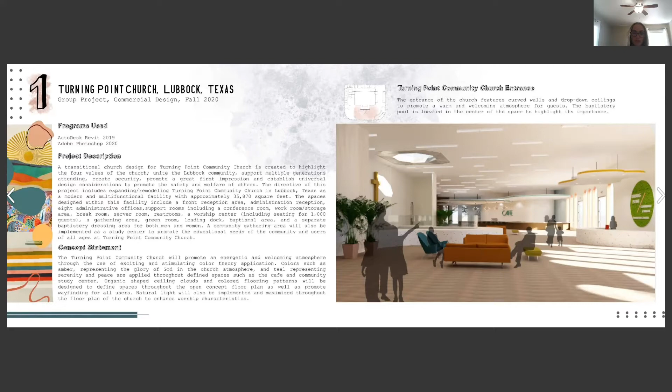Next, we have the Turning Point rendered floor plan. This facility will be attached to the previous church building, which has been renovated into the children's worship area, and that connection will be through the children's check-in area in the back right side of the facility. The exterior walls of the new facility are curved in order to create a focal point around the baptistry pool.

The reception desk is located directly across from the baptistry pool and up against the entrance wall in order to prevent obstructing the view to the baptistry pool. The community study center and cafe area are located towards the front of the facility so that they can be used while the other areas of the church are closed, maximizing the usage of the church.

The offices are located to the left of the worship center to create a sense of privacy from the children's check-in area and worship center. Multifunctional furniture arrangements are used throughout the floor plan so that the furniture in any space can be rearranged for an assortment of purposes. And lastly, we have implemented wayfinding techniques through colorful paths in the flooring in order to help guests navigate the church with confidence.

Then on the right, we have the reflected ceiling plan. The entrance and worship center feature 20-foot ceilings in order to create a grand appearance. A skylight is located directly over the baptistry pool in order to highlight that area and its importance.

Drop-down cloud ceilings are located above the reception desk, community study center, cafe, and children's check-in in order to make those smaller spaces feel more intimate and private. The admin reception area features layered lighting techniques and a unique wavy light fixture in order to further the curves within the design of the church.

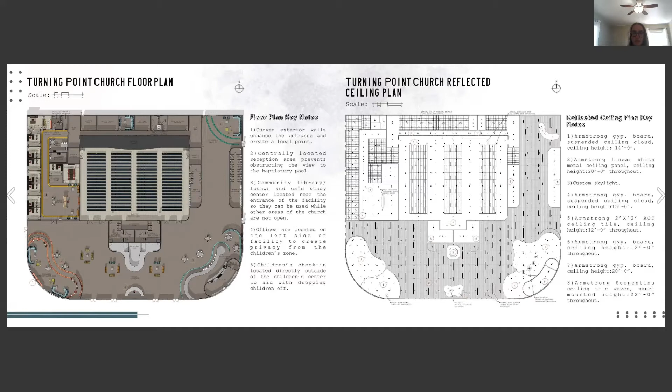Ceiling tile waves are located in the worship area, which again continues the curves within the design of the church, which will be seen in a later perspective. All right, next we have the elevations of the church.

First, we have the design section of the building where you can see the pastor's study, break room, resource workroom, an office, server room, and admin reception and the cafe.

Here you can see the wavy light fixture I was previously talking about in the admin reception. On the back wall of that room, we have a custom wall design, which again furthers the curves throughout the design of the church.

If you look over here at the cafe area, you can see the custom wooden space dividers separate the cafe from the entrance of the church. We decided to use space dividers instead of a solid wall in order to keep the space feeling open and to prevent obstructing anyone's line of sight.

When parents can easily see through a space, they are more likely to feel comfortable leaving their child while they attend church service. This also reduces the likelihood of an active shooter entering the church.

Next, we have the general reception wall elevation, which features an artificial greenery welcome sign with the Turning Point Community Church logo and statement. This helps define the reception desk area for any new guests.

14-foot arched windows continue the curvy designs throughout the church and also allow a large amount of natural light within the space. 12-foot glass doors also allow natural light within the space, and emergency exit signs are located above each of these exterior doors to meet the International Building Code requirements.

Then we have the office's elevation, where smaller arch windows are featured throughout, again furthering the curvy designs throughout the church and allowing natural light within the space.

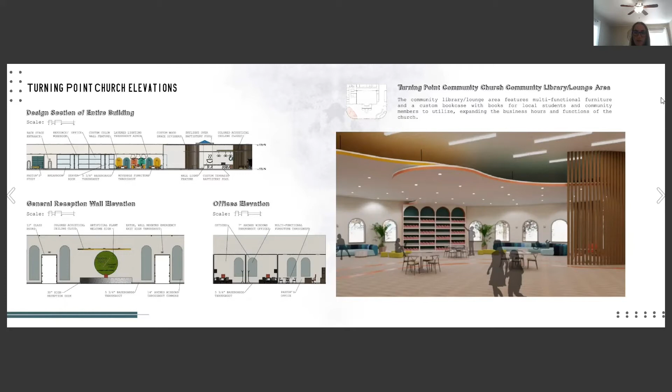Study spaces are not common in Lubbock, so the library lounge area gives students and community members a space to visit when they need to study or do work.

Next, we have the Cafe Center, which serves the same purposes as the community library lounge, except this space features a kitchen behind the cafe wall, which provides the church with an opportunity to expand the business side of their church operations. It also provides the church with a space that supports catering if there is an event that requires food.

To the right, we have a view to the worship center where you can see the ceiling tile waves that I had previously discussed.

Layered lighting techniques are featured throughout to allow the production team to have full control of the space. Screens are located on the back wall of the space to ensure that all guests have a view to the speaker.

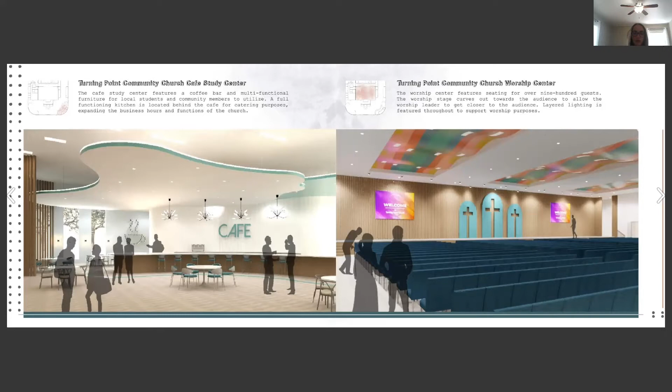All right, the next project I will discuss is the Texas Tech campus in Junction, Texas. This project was focused on incorporating new facilities within the design of the Junction campus in order to give new life and purpose to the school.

The clients wanted the design of the space to encourage students and guests to explore the outdoors. In order to do this, it was important to incorporate flexible design characteristics and neutral colors throughout the design of the facilities. An example of the flexible design characteristics can be seen in the 3D view of the Welcome Center and Management Office's reception area.

Here I used glass garage doors throughout, and not only does this provide the space with lots of natural daylight, it also provides the space with views to the outdoors and, when open, direct access to the outdoors.

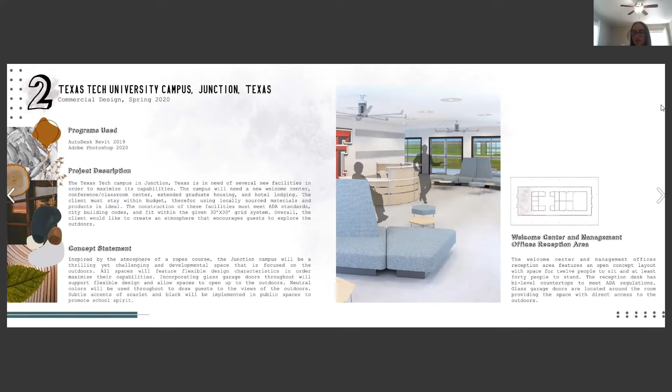On the left side of the page, we have the Welcome Center and Management Office's rendered floor plan. This facility is to be located at the front of the campus and will serve as the face of the campus since there is currently no defined entrance.

Glass garage doors are incorporated throughout the facility and open to the outdoor lounge furniture. The reception area features seating for guests and space for 40 people to stand.

The reception desk features bi-level countertops to accommodate ADA guidelines, and a custom Texas Tech Double T extrusion is featured on the back wall to promote school spirit.

There are 6 medium-sized offices and 2 large-size offices, all of which contain a desk system and seating for guests. A kitchenette and dining area is located in the center of the plan, and the kitchenette contains a custom extrusion

that holds a sink, under-counter mini fridge, and vending machine. Lastly, there are 2 small conference rooms and 1 large conference room, which all contain multifunctional furniture and a smartboard presentation area. Next, we have the conference classroom rendered floor plan.

This facility again features glass garage doors throughout that open up to the outdoor lounge furniture. The desks and chairs are foldable and on casters, making them easy to store in the storage rooms located in between each classroom. The hotel half of the plan also features 2 different living arrangements.

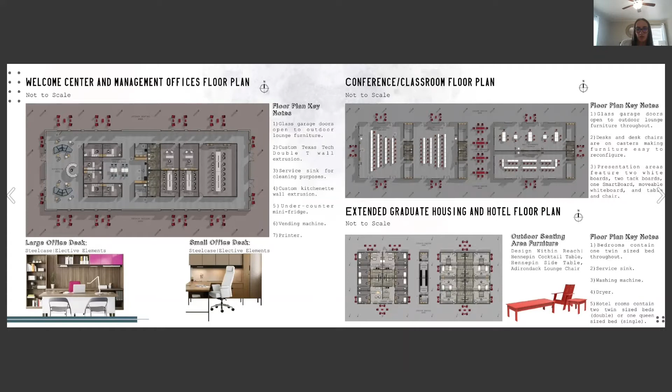The single hotel room contains 1 queen-size bed, and the double hotel room contains 2 twin-size beds. All hotel rooms feature a multifunctional storage desk system and direct access to a private restroom. A washer and dryer room, as well as janitor's closets, are located in between the hotel and grad living units to support the needs of both students and guests.

Here we have a 3D view of the Welcome Center and Management Office's large conference room. This space features seating for 16 people and a smartboard at the front of the room for presentation purposes.

Layered lighting techniques are implemented throughout the space to increase flexibilities for presentations. And lastly, all office doors contain frosted glass panels to allow natural light into interior spaces.

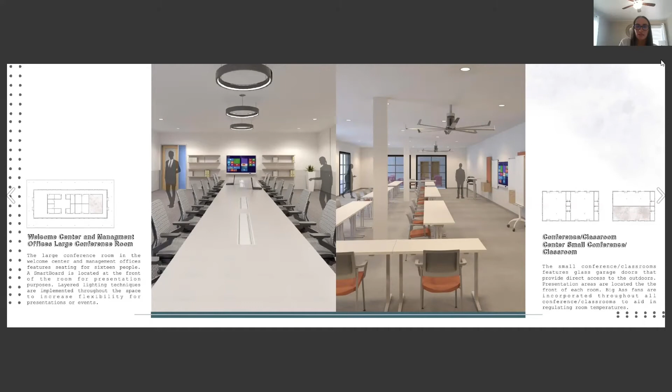Then we have the Conference Classroom Center small conference classroom. This space features glass garage doors that open directly to the outdoors, and ceiling fans are incorporated in order to regulate room temperatures.

Next, we have the extended graduate housing 4-bedroom living area. This space provides students with a space to lounge and relax, and a ceiling fan is featured in the space to regulate room temperatures. Then to the right, we have the extended graduate housing 4-bedroom kitchen and dining area.

This space features an ADA kitchen sink, electric stovetop and oven, coffee maker, and stacked refrigerator and freezer. This will provide students with a space to cook when the dining hall is closed.

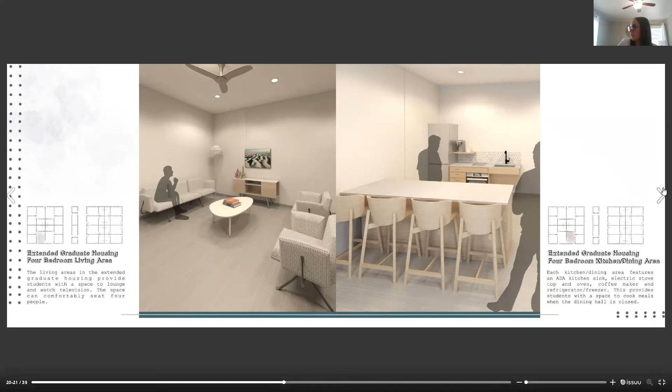On the left, we have a 3D view of the hotel's single hotel room, which features a queen-size bed, wardrobe cabinet, wet bar area, desk, and seating area. The wet bar contains an under-counter mini fridge, storage for snacks, and a coffee maker for guests to use when the dining hall is closed.

Then to the right, we have the hotel restroom. Each hotel room has direct access to a private restroom in order to provide guests with ease of access, and all restrooms implement universal design by featuring ADA sinks, toilet, and a roll-in shower.

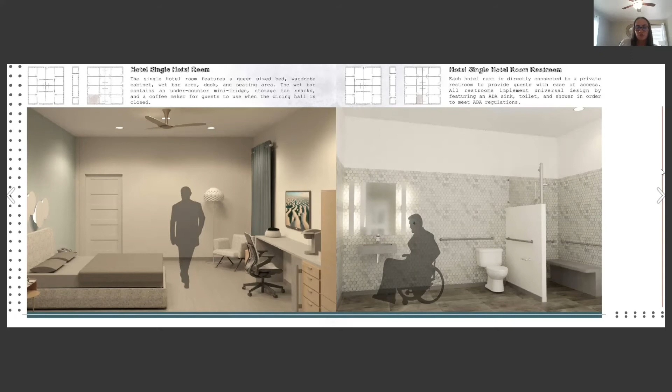Overall, the design of the living spaces is simple and contains neutral colors in order to encourage guests to explore the outdoors. All right, the third project I will be covering is the Texas Tech Department of Design in Lubbock, Texas.

This project was focused on converting the current classroom space in the College of Human Science building into a new suite of offices for the Department of Design.

The goal of the new office space was to reform productivity and creativity through the use of flexible work areas, eye-catching designs, and the attention restoration theory.

The view of the additional office space located on the right illustrates the use of eye-catching materials and flexible work areas. This space will be used by grad students at random times throughout the day. Because of this, the lighting fixtures are controlled by motion sensors to reduce electrical waste.

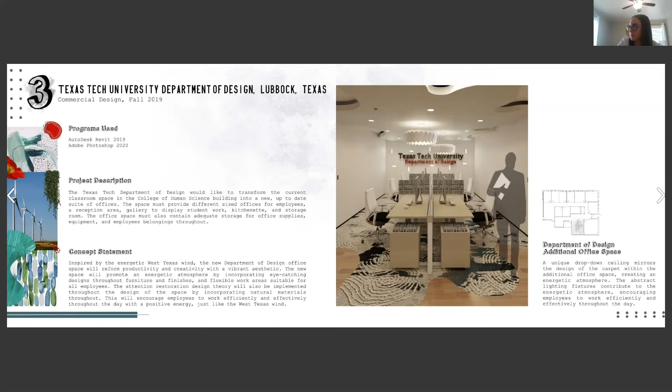All right, next we have the bubble diagram and dimension plan for the Department of Design. The offices are located on the perimeter of the building in order to maximize their access to natural daylight.

A custom extrusion reception desk, mailbox, gallery screen, reception seating, collaboration seating unit, kitchen shelving, and kitchenette seating unit are featured throughout the plan, all of which display a windmill-type design inspired by the West Texas wind. Then we have the blocking diagram and rendered floor plan.

3Form glass curtain walls are incorporated throughout the office space to maximize natural daylight throughout. Medium and large offices contain a desk system and seating area for guests, and the additional office space contains 6 height-adjustable desks with lockable storage.

The library contains bookshelves for design materials such as finish materials, and the conference room is located in a windowless room to prevent lighting problems for presentations and conference calls.

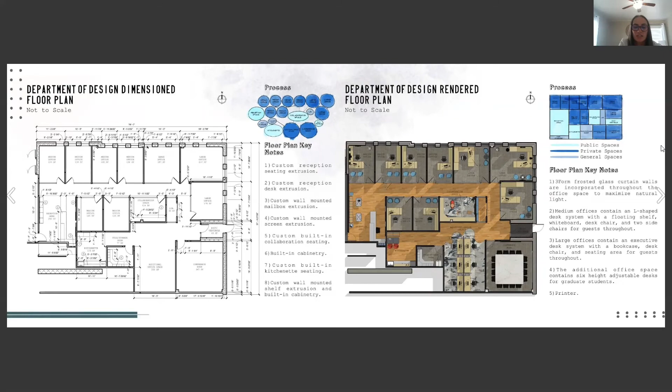The file and storage room contains a printer and built-in cabinets for office purposes, and the kitchenette contains a sink, microwave, and refrigerator for employees to use to prepare their lunch.

Next up, we have the lighting plan for the Department of Design, where you can see how each space within the Department of Design will be illuminated. The light fixtures within each office space, including the additional office space, are controlled by motion sensors in order to maximize the sustainability of the space.

Then we have the electrical plan of the Department of Design, which illustrates where all of the outlets and switches will be located throughout the space. Each space features adequate access to electrical outlets in order to maximize the efficiency of the space.

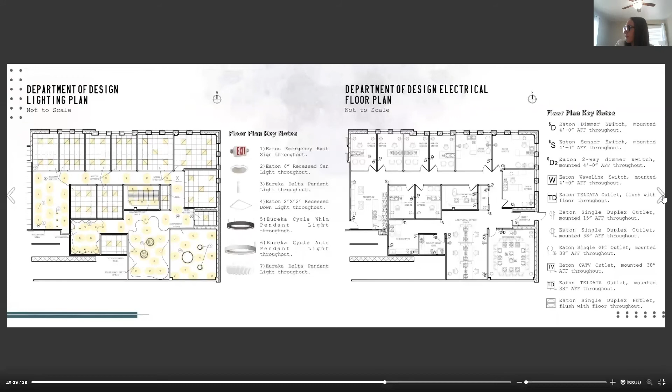All right, here you can see the view to the reception area. The reception desk features bi-level countertops to satisfy ADA regulations, and a display gallery is located behind the reception desk to display students' work. The custom extrusion screen outlines and highlights the gallery area and contains a windmill design that is inspired by the West Texas wind.

To the right, we have a view of the medium office, and here you can see the windmill design is used again in the whiteboard that is a part of the desk system. A custom double T extrusion is featured to the left of the window to promote school spirit, and the window coverings are controlled by an automated system to increase the sustainability of the space.

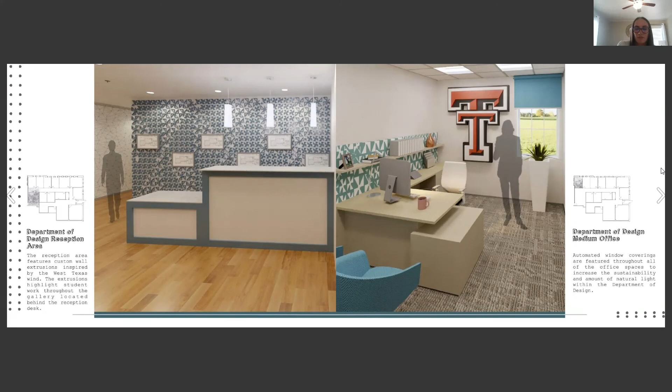Then we have a view of the large office that features an executive desk system and a larger seating area for guests, as well as the custom double T extrusion to promote school spirit.

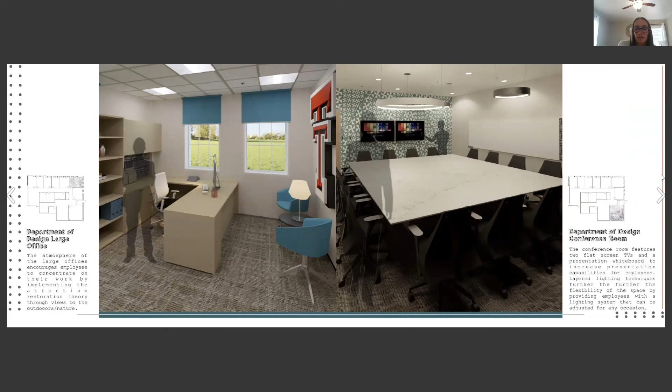To the right, we have a view of the conference room, which features 2 TVs and a whiteboard that doubles as a presentation board to maximize presentation capabilities. This space also features layered lighting techniques to provide employees with complete control of the space.

Then we have the last project of my portfolio, which is a residential home located in Ann Arbor, Michigan, where the clients wanted to renovate their home in order to support aging in place.

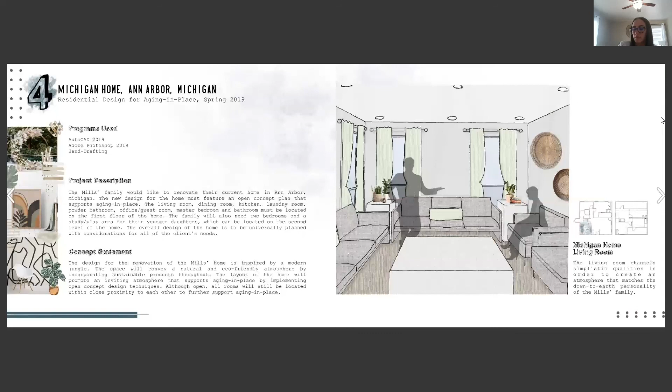The Mills family enjoys having guests over, so additional seating was added to the kitchen and a pull-out bed was added in the office to support their lifestyle.

The master bedroom contains a seating area for relaxing, and the closets are a reach-in style to maximize efficiency. The master bathroom also features a walk-in shower to support aging in place.

The second level of the home contains the 2 bedrooms for the children, as well as a restroom and a study and lounge area. The dashed lines represent where the ceiling angles down due to the roof of the home.

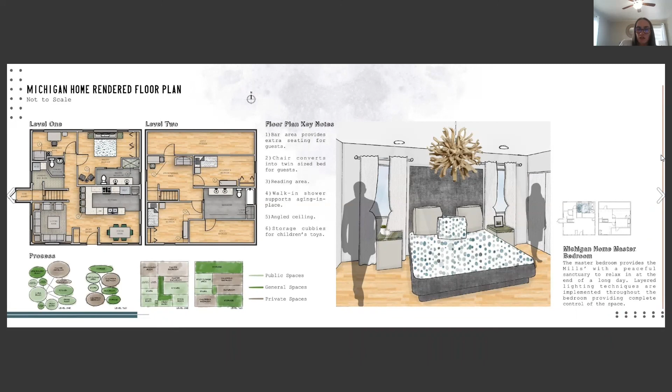Then to the right is a hand rendering of the Mills master bedroom. Again, neutral and earthy colors and materials are used throughout the space to match the personality of the Mills family. The bedroom also features layered lighting techniques to provide the Mills with complete control of the space.